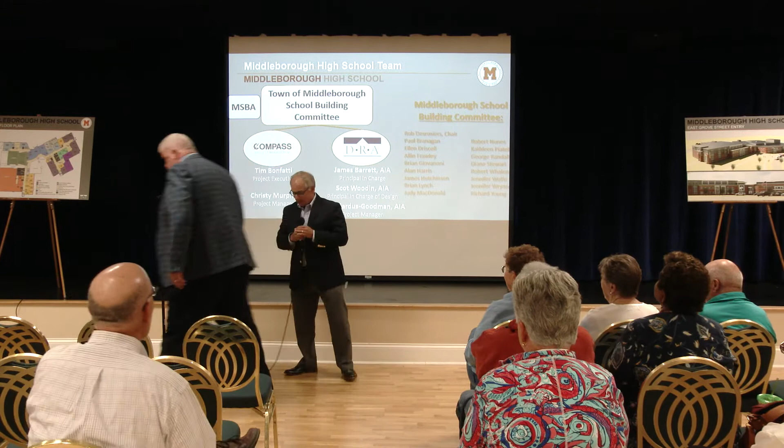Thanks, Brian. So, Brian mentioned we're the OPM on the project. We have another project team partner, DRA. They're the architects. Jim Barrett's here from DRA.

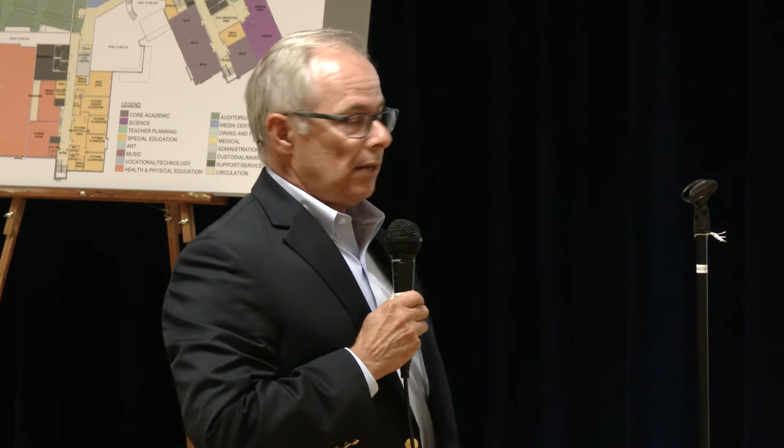Two groups that I definitely want to mention: the school building committee, which Middleborough is being very well served by. They put an awful lot of time into this project. They meet every month, actually before we were involved. And within that, they've selected a subcommittee of members who work with us every 2 weeks. It's a working group, and we work through all the details of the project so that we as a project team get decisions from them, we get direction. They've been excellent to work with, and I think it's a real tribute to the town how interested, as you can see, they come out on nights like tonight to support the project.

The other group I want to mention is the Mass School Building Authority, the MSBA. Aside from providing a significant funding grant to the project, which we'll talk about later, they also provide a lot of input on projects. They see dozens of schools in the course of a year, so they have best practices. They see what works, what doesn't work, and Middleborough and other communities get the benefit of that feedback. They've been really helpful in the project to us as a project team. So that makes up our project team.

As you can see, from then on, it was very important to the building committee. It was a directive to all of us on the project team to make sure that this project had as much input from the public as possible, and also was transparent. So we have a website where basically everything we do is shown, and you can go on that website, which you'll see the web address for.

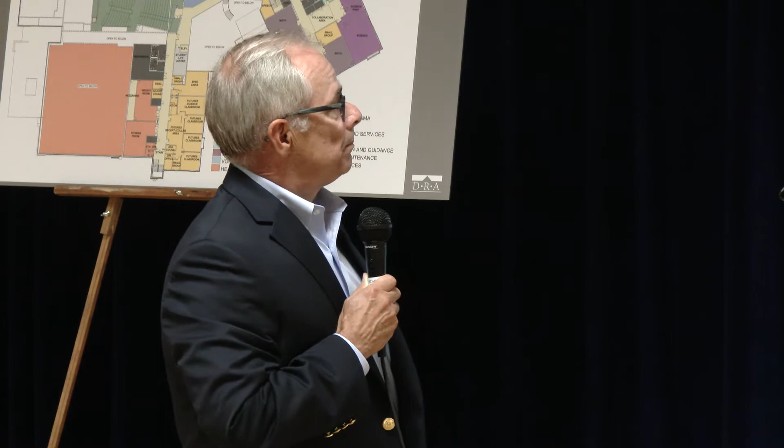The education plan is the first thing we do on a project, and that is working with the school administration, primarily Principal Branagan, but also with Superintendent Lynch, to develop in their voice what do they want, how do they want education to be delivered in Middleborough High School in the years to come. So Paul's going to get into that in more detail. But that's a critical part of how we and the architect learn the design and the process. Are we complying with the ed plan?

Do we further the ed plan by the decisions we're making in the design process? The next step was to put as many options as we could for the school onto the table. Additions, renovations, different sites. We had 3 different sites, many options, at least 9 options. We may have had more sub-options even. We also developed criteria, a list of things the options were measured against, to make this as objective a decision-making process as possible.

That got us to a short list, which we took 4 options and developed in much greater detail. Those options were 2 addition-renovation options and 2 new construction options, all 4 of them at the high school site. After that analysis was done, we ended up with the project you'll see tonight. That is the preferred option that you'll see.

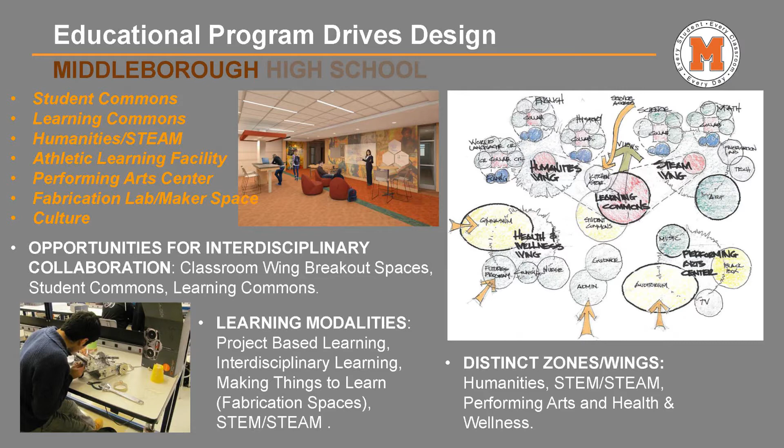This is an important element of our school, and here's why. Our charge was really not to create opportunities that our students can have someplace else. Our students who go to Bristol Plymouth will still go to Bristol Plymouth. But really what we wanted to do is take our current programming and bring it to the next level. For example, we have a very vibrant program called Computer-Aided Design, where our students can go on the computer and build homes and sheds and really create those graphical designs.

But one of the challenges we have is that's all they can do with it. Once they create it on the computer, that's pretty much where it ends.

The fabrication lab will allow them to take those designs and transform them, bringing it to life in a much different approach. It's taken our theater program and allowed them to really create their sets and create a technical theater program as well, which we currently don't have. So that fabrication lab and the makerspace really allow all of our content areas to have a piece of the puzzle, and you'll notice some of the modalities that are there.

One of the important elements to know as a community member is that it's really about flexibility. You'll notice in the designs that when you go through the 3 floors, the history department is on one floor and the English department's on another. That's very strategic because right now we're a department-based school, and we really thought that was an important element.

However, as we evolve and transform in the building, the idea is you could create academies, you could create interdisciplinary approaches, because our science labs go all 3 floors of the building, not currently how we have it, where all of them are formed on the 3rd floor. So it's really allowing us to take a building and create different aspects of education, learning academies, a freshman academy, because as we move in and evolve, the building can evolve with us as well.

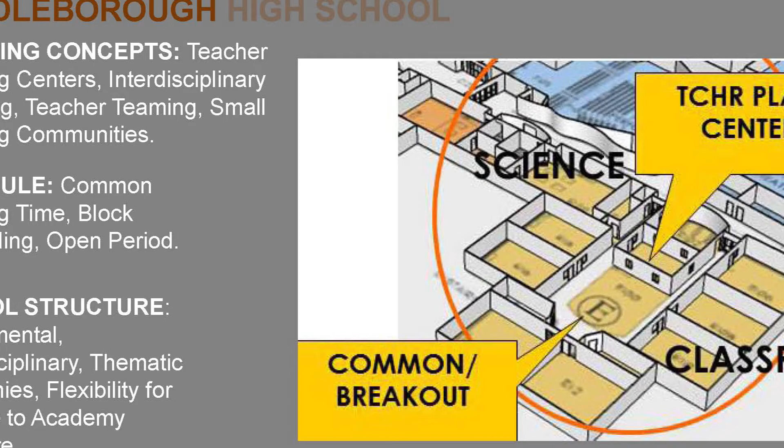The small learning communities in every content area, on every floor, have these collaborative spaces that are funneled right from every classroom in the building, which is kind of cool.

We're also looking at our schedule. Right now we have a block schedule, and moving into a new building, one of the things we're doing is exploring how to create a day in the life for students that's very different than what they currently have. We're testing the waters now of creating a schedule within a schedule. Some of our students have 5 periods in the day, others have 4. It's really an opportunity for us to do some experiments as we're getting ready to potentially move into a new environment.

And lastly, just the school structure. It's really something that, as our vision planning went from that bubble you saw a few moments ago, is to create a building that we can grow with for many, many years to come.

So thank you. Let me introduce Chip Barrett from DRA.

But there are things within it that are structural. This building is a very large block building, so there are core classroom spaces within it that have no natural light within the space. They have to be mechanically ventilated, and that is something that is very difficult to modify going forward.

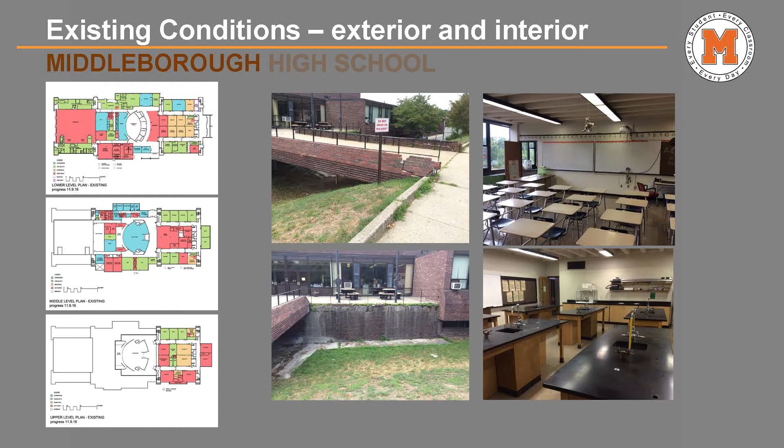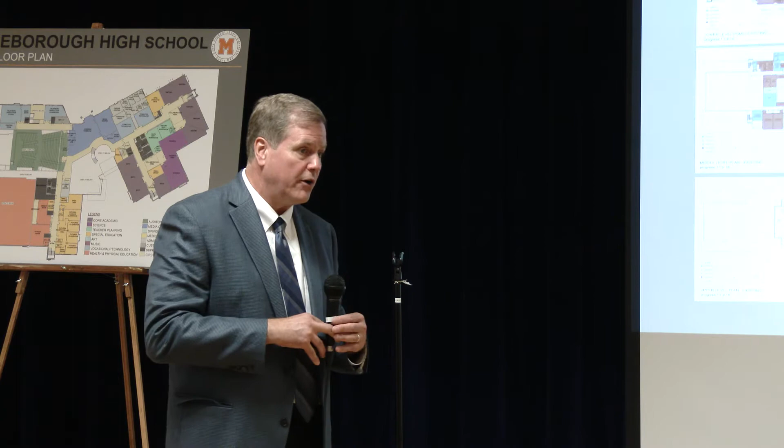Down the left-hand column, this was an assessment of the spaces. Those rendered in red are identified as undersized compared to, or inadequate relative to, current guideline standards through the MSBA program. Those in yellow are in fair shape, and those in blue are at or above current standard. So there's real need within the existing facility relative to how we shape the space and how much is there currently to be utilized.

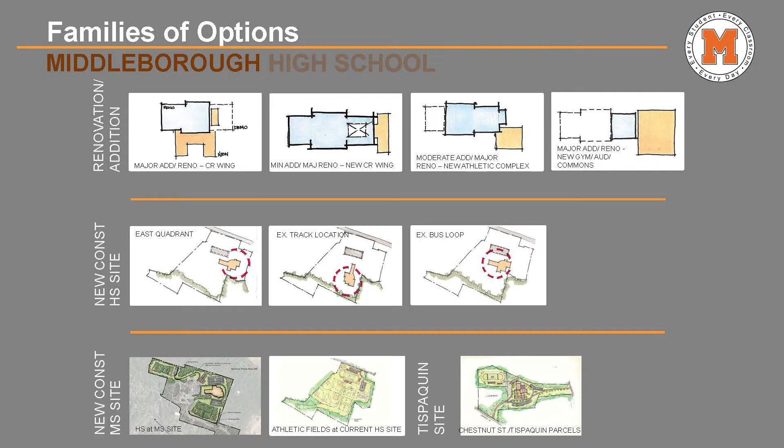So as we worked our way through, we looked at the existing site at the high school, but also new locations. We considered the middle school site as well as the Tispaquin site. Both of those were early on set aside for a variety of reasons: traffic, size, topography.

We focused on the high school site, and one thing we looked at is base repairs - what if we simply kept the building we had in the shape that it is, meaning the configuration, and just upgraded all the systems? So that is something we did explore.

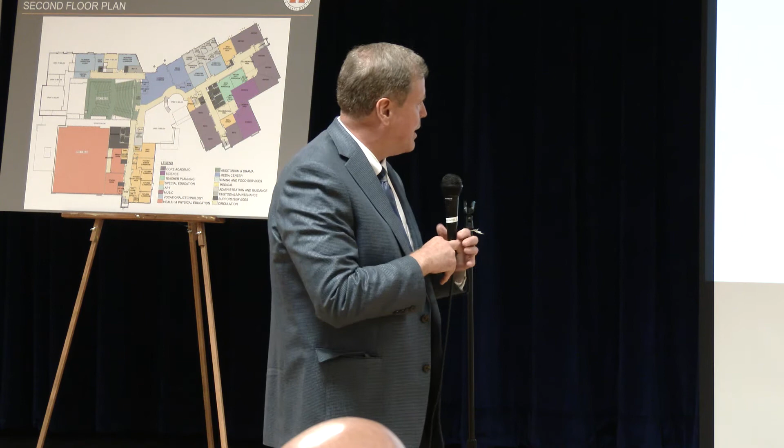For what was called the preferred option selection, as we submitted to MSBA, we had 2 renovation and add schemes, represented as C and D to the left, and 2 new construction options at the high school site. Ultimately, option A was identified as the preferred alternative, and that was a new construction approach at the site.

What I can share with you here are some of the renovation and addition alternatives we looked at. The area in blue within this diagram represents areas of the existing school. The areas in red are additions. So what this plan represents is the existing building with a large classroom addition off the back side of the building.

In doing so, what we were able to do was offload the population currently housed in the existing building to this new location, and then renovate and demolish portions of the existing building to fulfill the needs of that particular alternative.

Other options looked at new construction to the front. As we look at option B, we maintained in blue the area of existing, and what is in red is new construction. In option C, the majority of the building in blue is kept, with small additions to both ends of the building shown in red.

What this option required was a lot of modulars — temporary classrooms brought to the site. Those would have to be brought in at an expense and then sent off-site when we're done, so there was a cost center associated with that that wasn't advantageous from the planning standpoint.

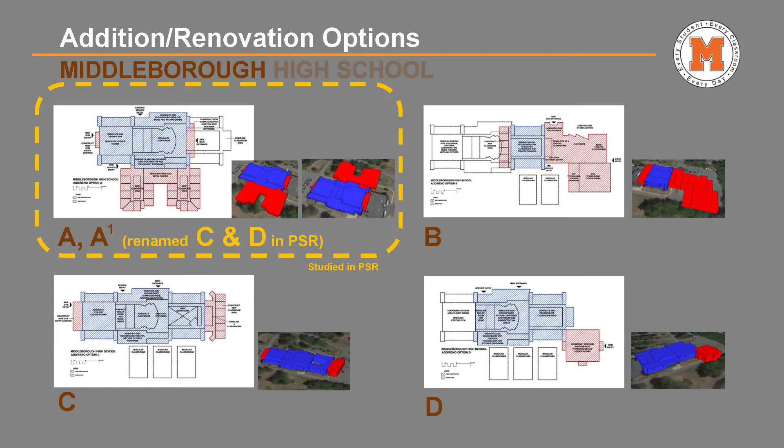And then lastly, an option that kept this portion of the building and built new at this section, but again had a large need for classroom space as part of a modular barn. So these were the options that we ultimately focused on as renovation and addition options.

And then in terms of new construction, we focused on the existing site. One option is the shaded area of the existing building, just off to the left of it as you come in off of Grove Street. And then a second, which was further back in the site, more along the area of the existing track and field area on the site.

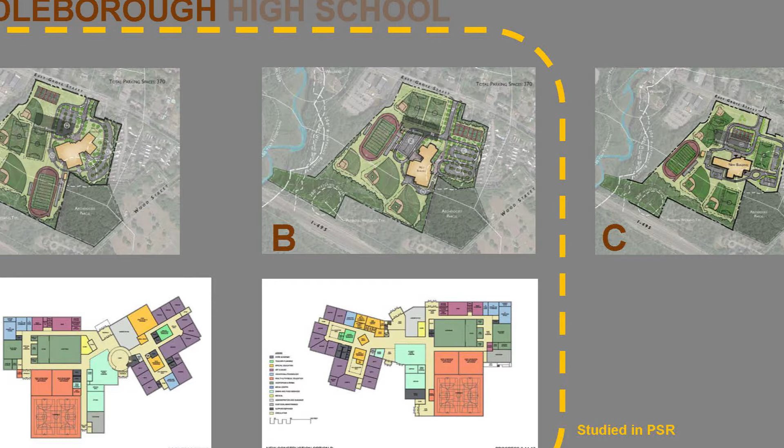We took those four options and tested them, looking at them in a variety of ways. We also brought it out to the community through workshops. As Tim mentioned, we had an opportunity to have a workshop here at Oak Point — I believe it was in March.

As we did that work, we looked at each of the options. Those to the right here are the renovation scopes of work, and those to the left are the two new construction options. As we went through this exercise at the workshop, we had the attendees place their ideas, voting yes or no in terms of favoring one alternative over another, and we were able to develop an understanding of what people thought.

What we found was that people were more aligned with the new construction option for a variety of reasons identified as advantageous, but they also identified that it was more of a blending of the two options rather than purely taking one or the other of the alternatives. So we continued on in the process with that in mind.

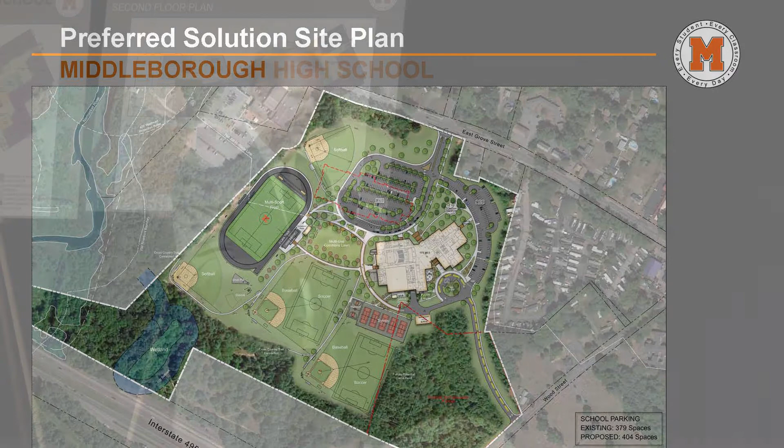Buses would come to the site off of this once construction is complete and line up along this backside. Students from the buses would enter off the backside, while parent drop-off students would come from this side, to a common core at the center of the building. Once everybody's in the building, this entrance would become the main entrance, the place where you'd be buzzed in on a regular day-in, day-out basis as a visitor.

This is a diagram of the first floor plan. As Principal Branagan touched on, we worked very carefully and closely with administration, teachers, students, and staff members, including custodial, to understand how the school could best work.

This entrance point is the main entrance off of the parent drop-off side of the building, to orient you, and this is the main lobby space. This entrance point is the bus drop-off. Once all the students are loaded into the building, this would be locked off for the remainder of the day, and this becomes the main entrance point to the facility. As we look at the facility, this zone is administration.

This zone, as Principal Branagan identified, is a combination of sciences in the dark purple and core academic in the lighter lavender color. Here it's identified as English, and so it reflects the departmental model that's utilized today.

Everything to the left of the diagram as you look at it represents the more public elements of the building. We have the auditorium space, sized very much as the existing auditorium is, with a black box theater associated with it. There is band and music classroom in this zone, and gymnasium and locker room in this zone.

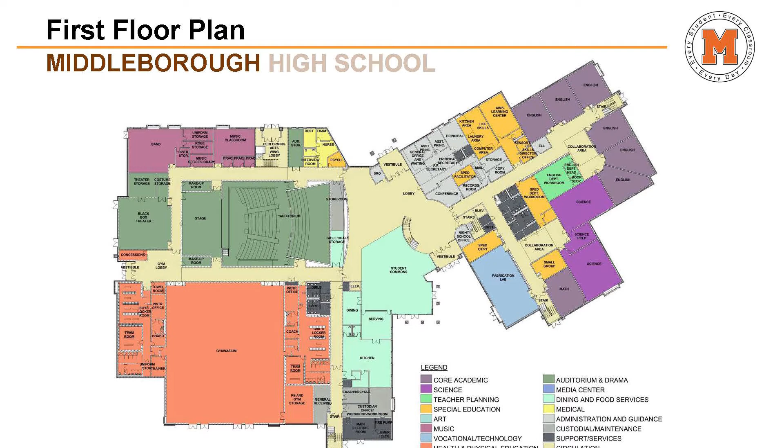When you think about the building from a zoning standpoint, you can enter through the performing arts wing lobby space in this zone, or from the gym lobby space in this zone, without having to come across into this portion of the building. So from a security standpoint, we have a good opportunity for after-hours usage that doesn't require coming over into the academic side of the house. That type of planning is carried through all three floor plans in terms of that separation.

As we move up into the building on the second floor, from a planning standpoint, this second floor plan is very similar to that of the first.

This zone, very important, this blue area, is the Learning Commons. As Principal Branagan identified, the Media Center in concert with the Learning Commons affords an area for students to come together, a great collaboration space, learning space, and an opportunity for quiet study as well, all within that area but right at the core of the building.

To the left-hand side of the house, this upper portion is television production and studio, the upper portion of the auditorium, and this is the upper portion of the gymnasium, but over this area are some student fitness and weight room facilities.

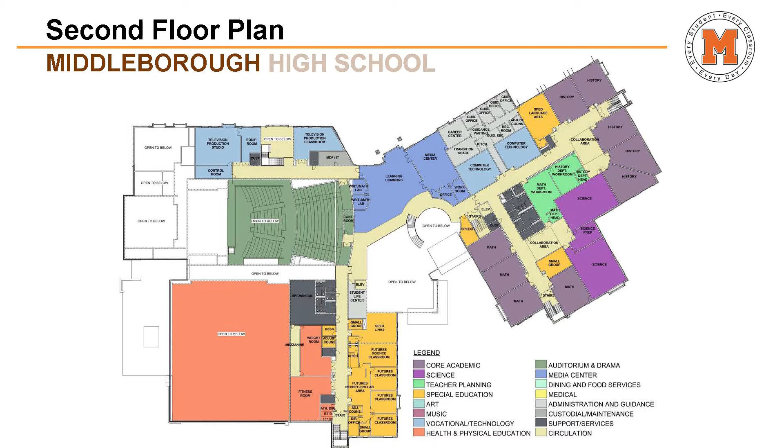There is also a small mezzanine balcony that overlooks the court space, providing opportunity for filming of sports, etc., and another viewing area. This zone is that of the Futures program, within its own self-contained area.

The Futures program has its own entrance point to the facility, but also access to the general common areas of the building as needed by those students. As we come up to the third level, all of the areas on the left-hand side, which are public, fall away. They become roofscape. To the right, we have one more core area for academic use, combining science and world language on the third floor.

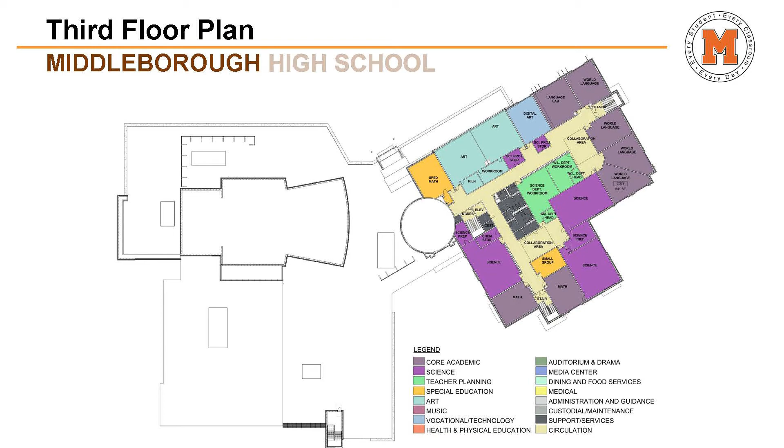The light blue area at the top is that of the art spaces. These art spaces can work together and then also with movable partitions to create larger, combined studio space. It also has within it a digital arts media space.

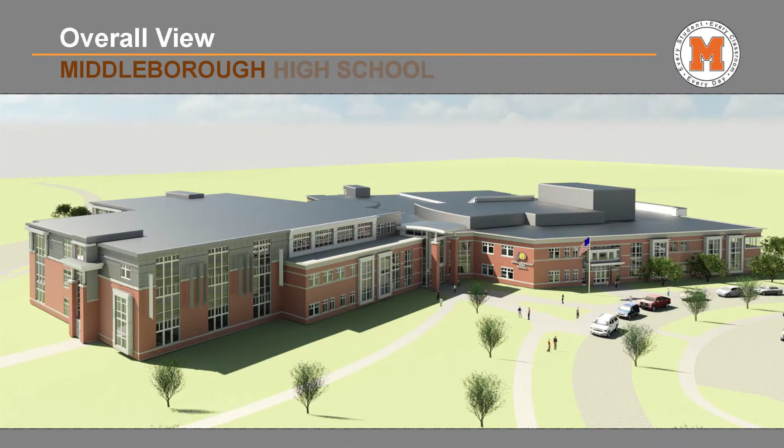The next thing we'd like to share is just a quick overview of some of the exterior views of the building. This is an aerial view as you're coming from East Grove Street, looking at the facade of the building, with the main entrance point and the signage of the building.

In terms of the vocabulary of the building, we are looking to traditional elements found throughout the community, like mill buildings and some of the brick iconic buildings in the community as well. Elements like oriel windows are reinterpreted, with large combined windows grouped together in ways that may have been used in mill buildings, etc.

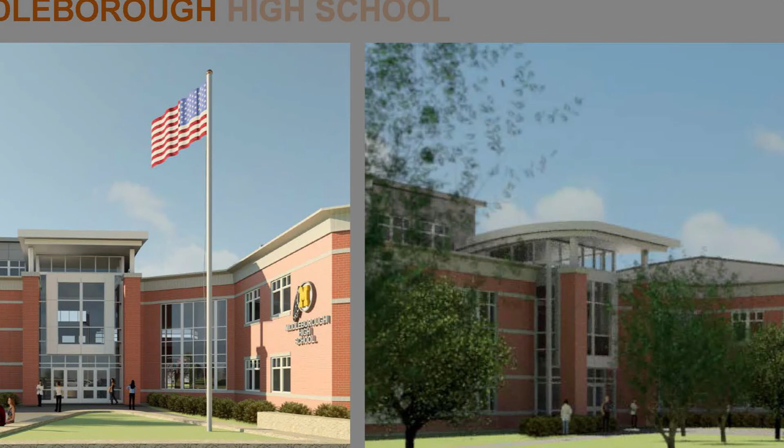This is that entrance point to the arts area, and again, the main entrance point to the facility. As we come to these two images, this is a close-up of that entrance area, showing parent drop-off along this area, and then pedestrians walking into that entrance point to the facility.

This view, taken up the sidewalk a little bit more towards East Grove Street, looks into that main entrance portion of the building.

There's good opportunity for outdoor use of space along the side of the building. Our landscape architect is working closely with us in terms of developing those ideas around how the exterior of the building will complement the learning spaces of the interior, so that learning can happen anywhere on this site.

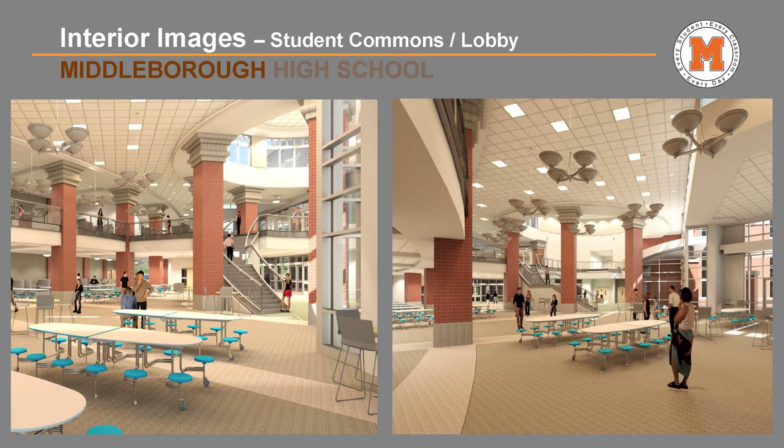There we go. These are two interior images. This is taken from that student commons space. So you've entered, and this is the stair leading up to the learning commons area. This is another view as you look across the spine of the building.

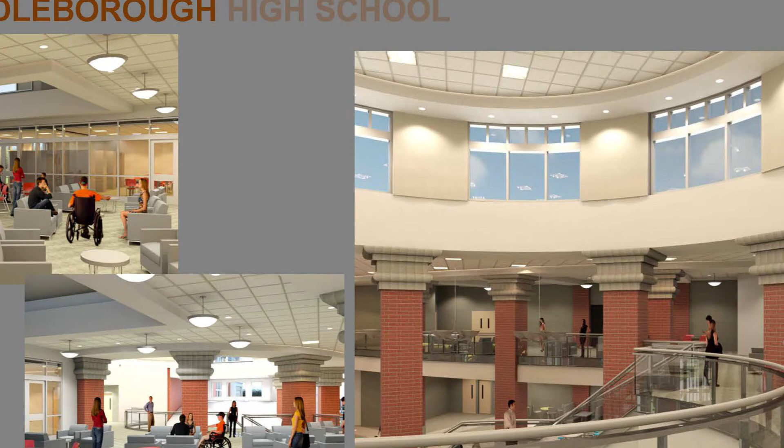And then these images, looking from the upper area along that learning commons down into the student commons area, give you a sense of the variety of furnishings so that you could have different types of groupings of students coming together for individual study and team learning opportunities, both quiet and active study in these areas.

At this point, I'd like to turn it back over to Tim Bonfatti, who's going to share with you some of the finance information on the project.

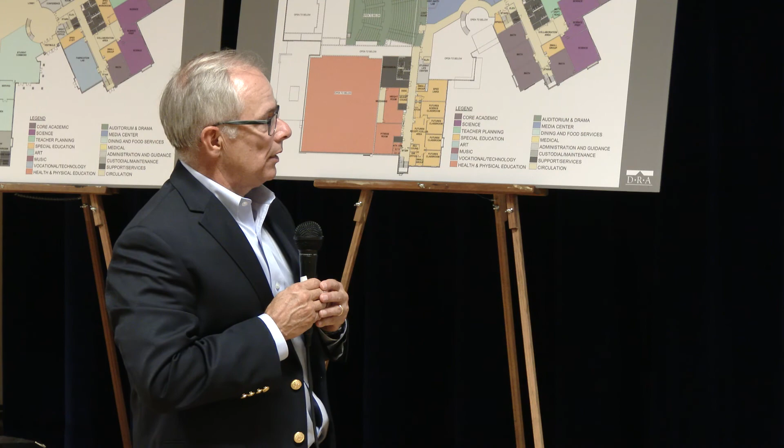We continue working with the MSBA on design review. That takes roughly close to a year. If we go out for bid to general contractors in 2018, we expect to occupy the new school in January of 2021, so we would move in over the Christmas break. Then, from January through to the next fall, would be the demolition of the old school and the remaining site work, parking, and fields construction that needs to occur. Basically, the project would be complete in total in September of 2021.

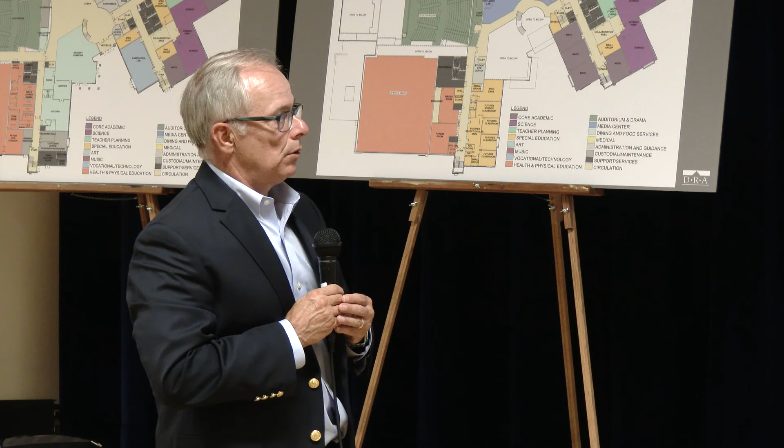Thanks, Tim. My name is Rob DeRozier. I'm the chairman of the building committee. What we're here tonight to tell you is we think we have the right school for Middleborough at this point.

The current school is past its useful life, and we've looked at trying to save it. A lot of us went into this assuming that we'd be able to renovate it and save it, but it's not the most cost-effective thing for the town, and it won't really meet our educational plan going forward. We've held the process, like this meeting tonight, many times, trying to be open and honest and gather a lot of public input so the community is involved. We think that the new school will address the needs of the community and the schools for the next 50 years. It's a lot more flexible than the present school, and there'll be a lot more opportunities for growth and changes in education. It won't be locked into one particular program.

We're very fortunate, as Tim said, to have a contribution from the Mass School Building Authority. They've been very supportive. They've moved us to the head of the line as we've gone along because they see our need and that we've been prepared. And as you heard earlier, we looked at a base repair. The problem with that is, as soon as you start working on the building, it triggers all the other code upgrades. Before long, you're spending $65 million over a period of 5 to 10 years on an old building. With the MSBA contribution, we can spend less than that and have a new building that'll last us 50 years. So we're asking for your support.